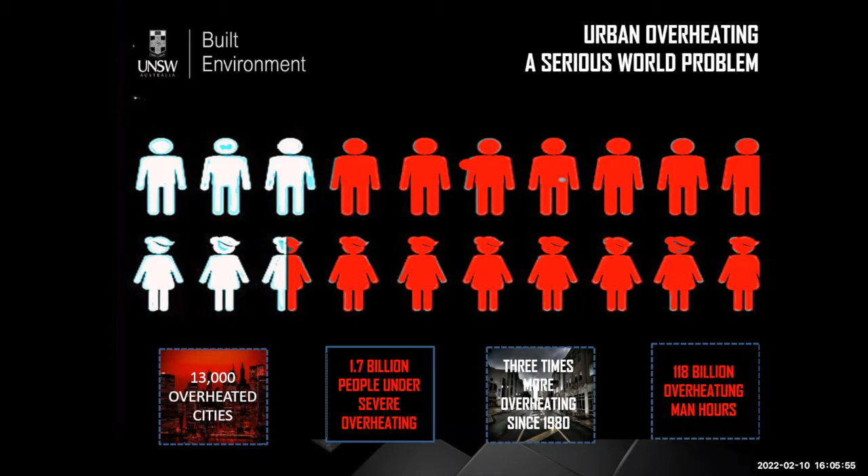Is urban overheating a serious problem? Yes, it is one of the most serious problems around the world. According to a recent publication, there are more than 13,000 overheated cities around the world. There are about 1.7 billion people under severe overheating. Since 1980, the number of overheating hours has almost increased by 300%. In total, there are 118 billion overheating man-hours around the world. It seems to be one of the major climatic problems around the world.

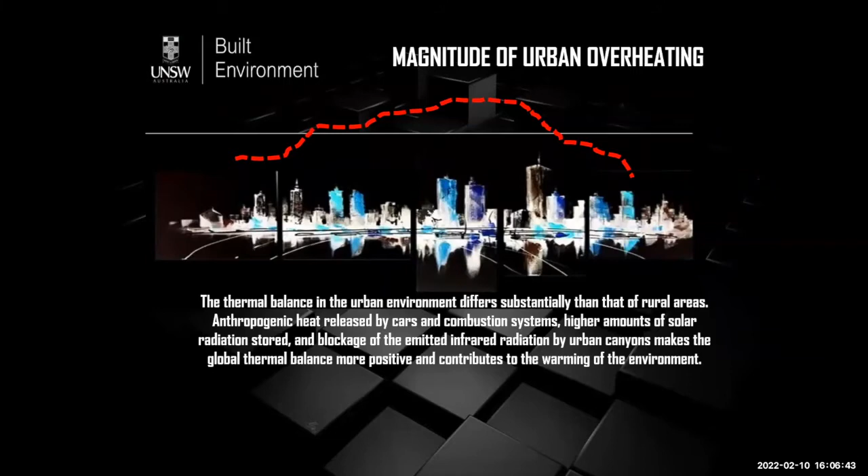Urban overheating has to do with the increase of temperature in our cities, in the denser parts of the cities, or in the center of the cities, because of the positive thermal balance in the urban environment, and the big difference between urban and rural areas. This is because of the anthropogenic heat released by cars, combustion systems, etc., the high absorption of solar radiation, the advected heat, the emission of infrared radiation by urban canyons, and many other issues.

But the problem of urban overheating is not just the increase of temperature in our cities - it also has to do with the increase in the duration of hot spells. If we plot the number of days during summer with the duration of hot spells from 1890 to 2020, you will see that the number of hours above 37 degrees, the red bars, has increased tremendously during the very last years. The same also happened regarding the number of hours above 40 degrees.

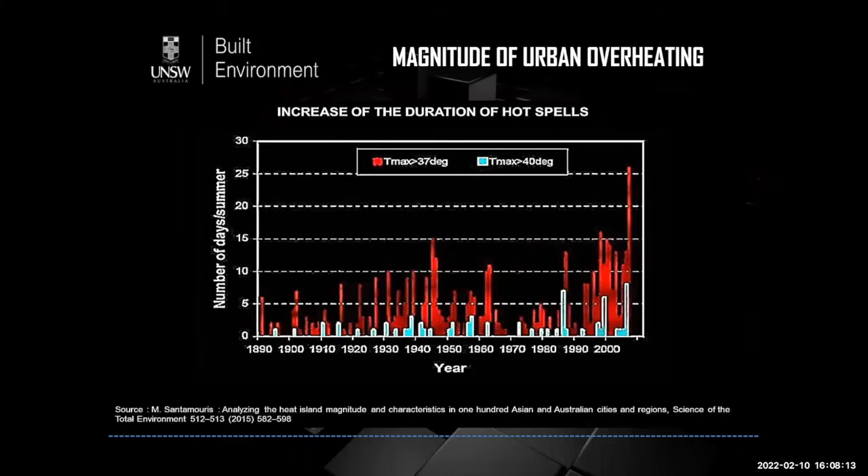Once we check the magnitude of urban overheating, and especially the number of heat wave episodes above 37 degrees, from the beginning of the past century up to our days, we see a tremendous increase of the magnitude, but also a very important increase of the frequency of extreme events. So urban overheating is the increase of the temperature of our cities, together with the increase of the duration of the hot spells, and the increase of the magnitude and frequency of extreme climatic events, heat waves.

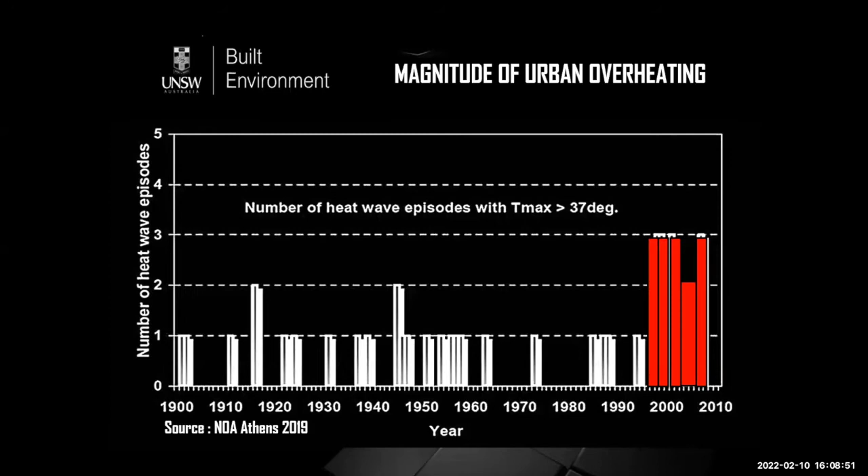Do we have a good knowledge of the characteristics of the phenomena? Yes, because either we monitor urban heat island using space technologies and understand the magnitude of the so-called surface heat island, or with ground stations we can have a lot of information about the distribution of the temperature. We also have very powerful monitoring and simulation tools like mesoscale modeling that allow us to understand in good detail the characteristics of urban heat island.

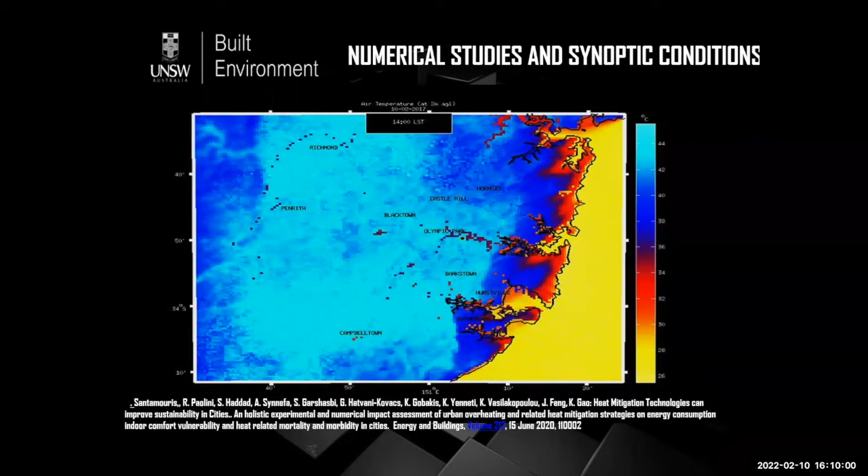You see, for example, here in Sydney, the results of mesoscale modeling that show the difference in temperature between the eastern part of the city, which is the coastal part, and the western part of the city, which is close to the desert, is about 10 degrees. So in a distance of about 40 kilometers, there is a 10 degree temperature difference.

But it's not just that. During the very last years, we have understood that there is a very special link and synergy between global climatic change, extreme heat events, and the magnitude of the urban heat island. We now know that during extreme climatic events, the magnitude of the urban heat island increases considerably. For example, in Sydney during heat waves, the magnitude of the urban heat island increases by about 5 degrees.

This is because of the higher height of the planetary boundary layer that increases the advected heat to the city from the desert.

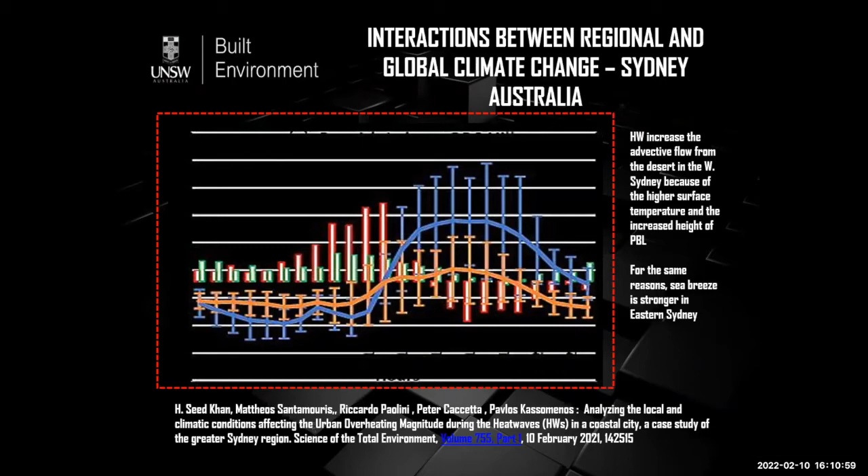So climatic change, and urban climatic change or urban overheating, has to do with higher temperatures, longer hot spells, higher frequency of heat waves, higher magnitude of heat waves, and there is a very strong interaction and synergy between global and local climatic change.

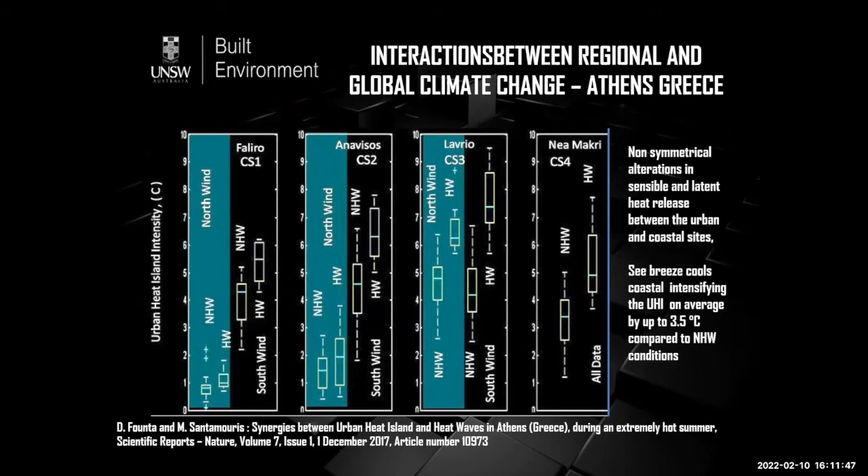It is evident that the increase of temperature in our cities may have a tremendous impact on energy, health, pollution, vulnerability, economy, comfort, and everything. During the very last years, we have performed a lot of studies trying to understand the impact of urban overheating on the different aspects of our life, and especially on energy.

Urban overheating affects very much the supply of energy and also the use of energy. It is evident that because of the higher temperature, the energy consumption of buildings, especially for cooling purposes, is increasing tremendously. On the other hand, it increases very much the peak electricity demand, obliging utilities to build additional power plants, increases the frequency of blackouts, and has a tremendous impact on the production and supply of electricity.

We need additional power plants. We have power disruptions. We have decreased efficiency because of the higher temperature. We have much higher increased electricity losses.

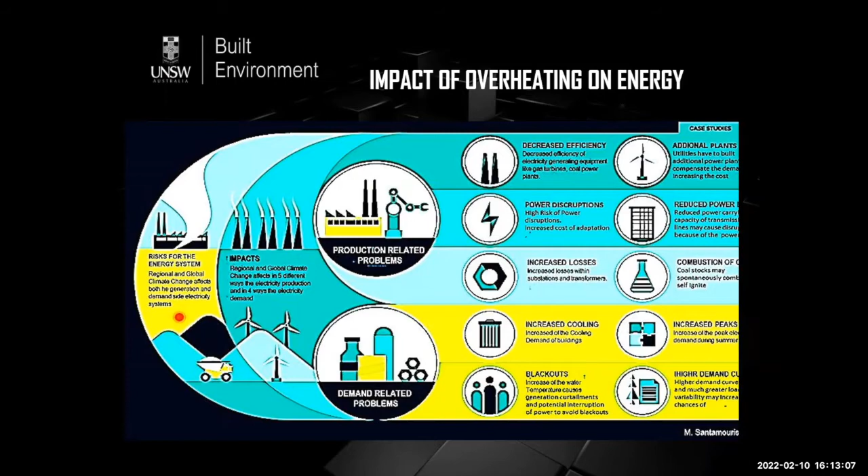Can we quantify all these impacts? Do we know exactly what is the real impact of urban overheating on energy? Yes. During the last years, data from several cities has allowed us to understand that the global energy penalty per square meter of city is close to 2.3 kilowatt hours per square meter on average, while the global energy penalty per square meter of city per degree of temperature increase is close to 0.7 kilowatt hours per degree and square meter. Or, the global energy penalty per person is close to 230 kilowatt hours per person, or per degree of temperature increase is 78 kilowatt hours per temperature increase per person.

So it is very important, and it is a very significant impact, the 230 kilowatt hours per person that we have to consume in order really to compensate the impact of urban heat island and urban overheating. This is really a very important problem.

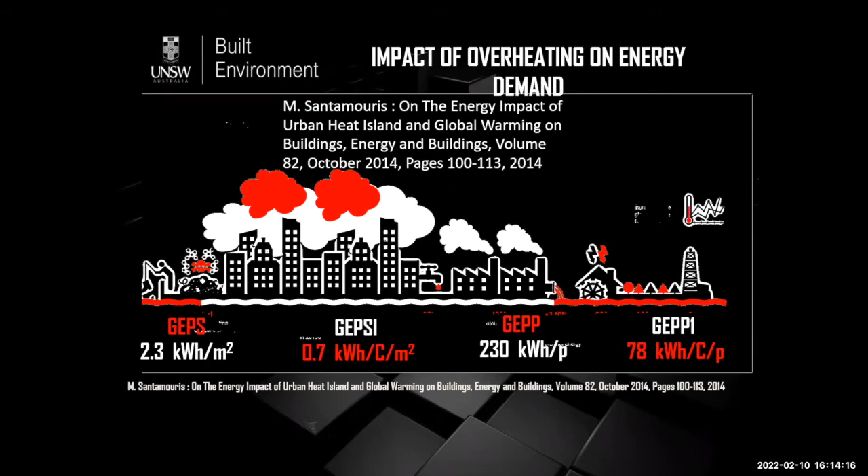This is very well verified and validated through real measurements of energy consumption in several cities. I'd like to show you the results from Seoul city in Korea, where we monitored the cooling energy consumption of thousands of buildings located at the center of the city under urban heat island, or out of the city. We found that the average monthly cooling energy consumption increases between 0.2 kilowatt hours per square meter up to 2 kilowatt hours per square meter, which is a very important energy increase. So the energy impact of urban overheating is very well determined, very well known, very well documented.

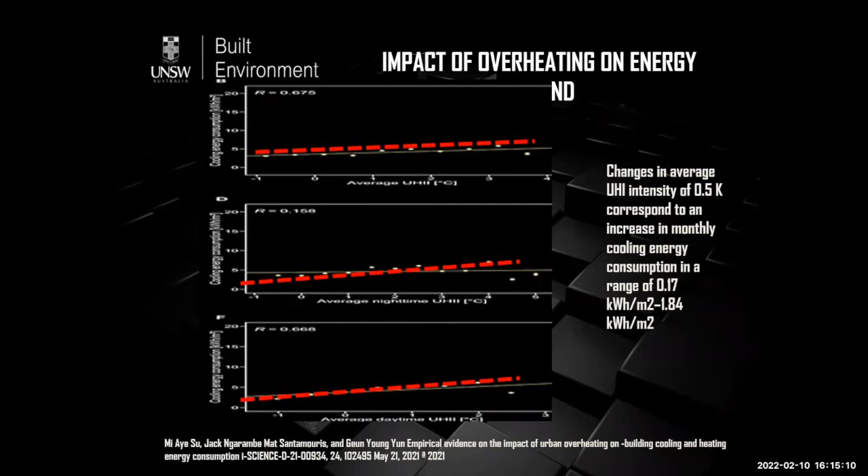This brings us to the very important problem we may face in future energy consumption for cooling. If we plot the actual energy consumption for cooling all around the world, it is quite low—it represents about 10 to 12% of total energy consumption in the residential sector. But given the tremendous increase of temperature in our cities, global climatic change, increase of population, increase of floor area per building, increased consumption, and increased availability of air conditioning, we expect that energy consumption for cooling will increase tremendously by 2050.

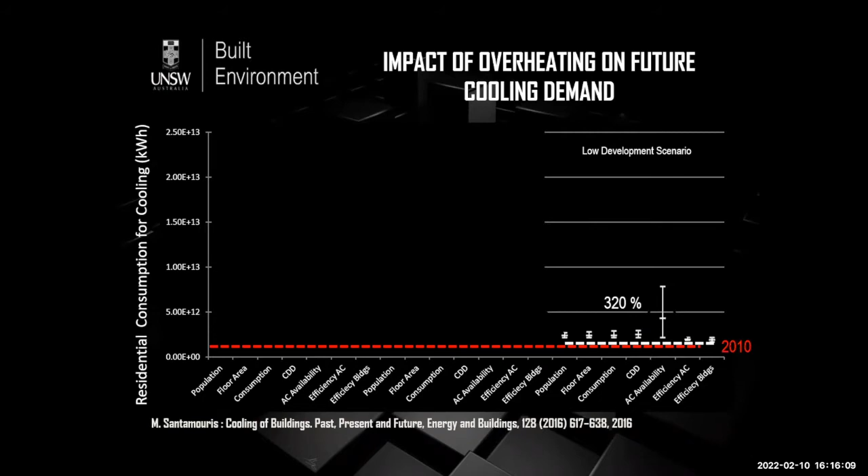There are three scenarios. The low development scenario predicts that by 2050, the total energy consumption for cooling may increase up to 320%. Under an average development scenario, the increase may be of the order of magnitude of 750%, while under a high development scenario, the increase of cooling demand may be of the order of magnitude of 2,270%. Of course, when uncertainties are taken into account, this increase may be much, much higher.

This brings us to the major question: how to face the problem of urban overheating, and how to find the proper resources to satisfy such a demand. Such an increase of energy consumption for cooling will be a tremendous problem for developing cities. There are studies showing, for example, that just one Indian city, Mumbai, may present by 2050 higher energy consumption for cooling than the whole United States.

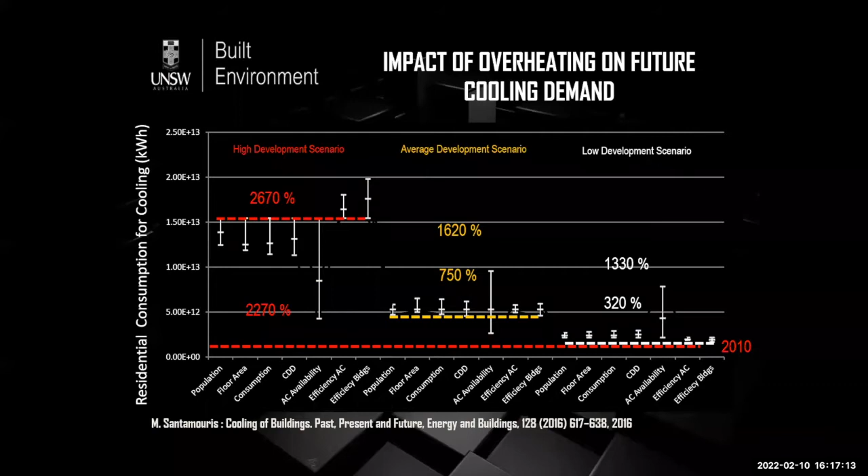But it's not just the increase of energy consumption for cooling. Urban overheating is increasing the concentration of harmful pollutants, especially ozone. 87% of the increase in cases of ozone increase is because of overheating. And the increase of ozone concentration because of urban overheating is quite high.

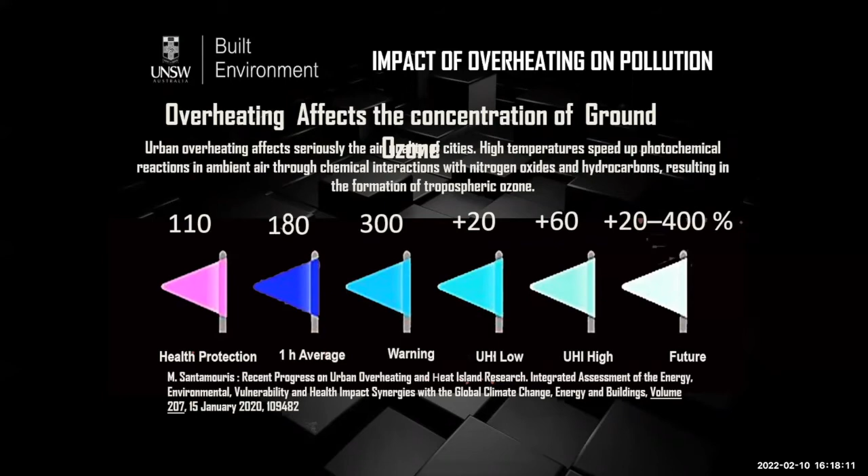For example, the limits or thresholds for health protection around the world average around 110 units. But on average, the 1-hour average is 180. The warning level that happens many times around the world is 300. But in the future, many studies predict that the concentration of ozone may increase up to 400%. And ozone is a killer.

On the other hand, we know very well that because of urban overheating, pollution is increasing. For each degree of temperature increase, the pollutants emitted by the power plants increase by almost 3%.

Apart from the impact of urban overheating on energy and pollution and environmental quality, one of the major impacts has to do with the vulnerable population. We know that vulnerable population lives in low quality buildings in deprived areas of cities, and this has a tremendous impact on their quality of life. Urban overheating increases the vulnerability of low-income population, increasing the use of air conditioning by almost 100%. Studies show that vulnerable population living in low-quality buildings need almost 100% more cooling to compensate for urban overheating than the average.

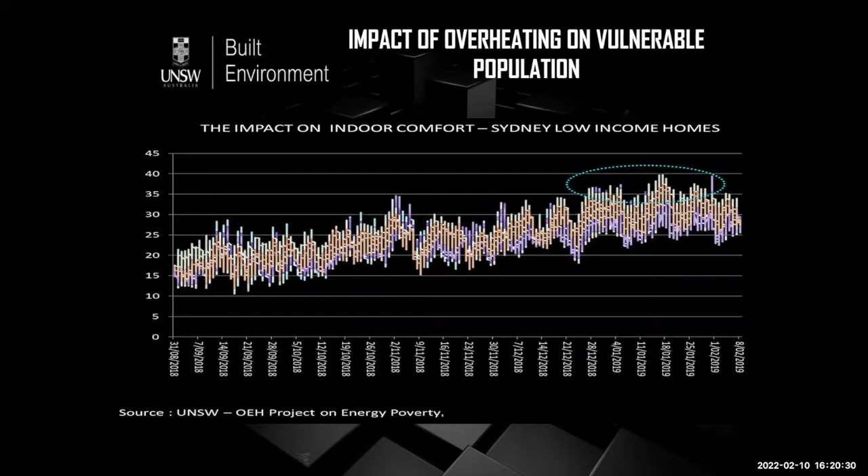The same happens, for example, in Western Sydney—not during a heat wave, indoor temperatures in low-income houses may be as high as 40 degrees. This brings us to the major problem and major impact of urban overheating, which has to do with health.

The impact of urban overheating on health is not something which is really simple. It is very much related to several parameters, mainly demographic factors which really affect the health of the population, socioeconomic factors, and also the quality of the health infrastructure in different cities.

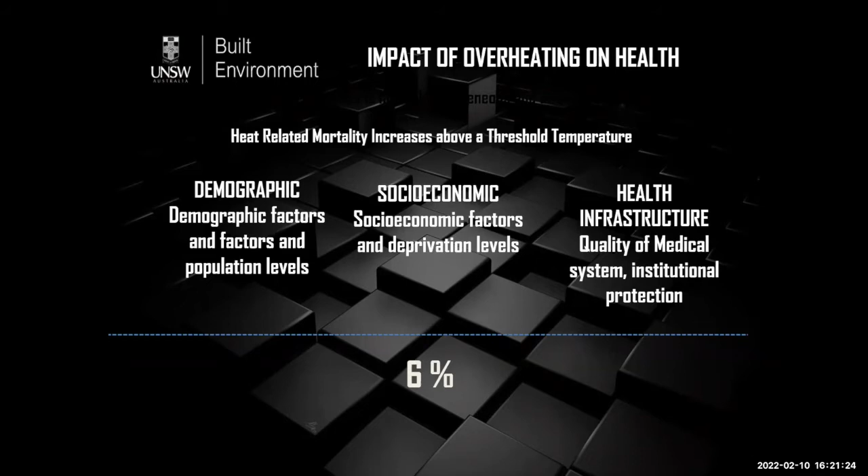On average, a recent study has shown that people living in overheated parts of cities present 6% higher heat-related mortality than the rest of the population in our cities. So there's a tremendous penalty that is paid because of urban overheating in our cities, and this is very well known through different studies all around the world.

So we don't behave the same way against urban overheating. In heating-dominated climates, the threshold temperature above which heat-related mortality is increasing is much lower than in cooling-dominated climates. This is very important once we plan for the future and try to assess the future of health in our cities.

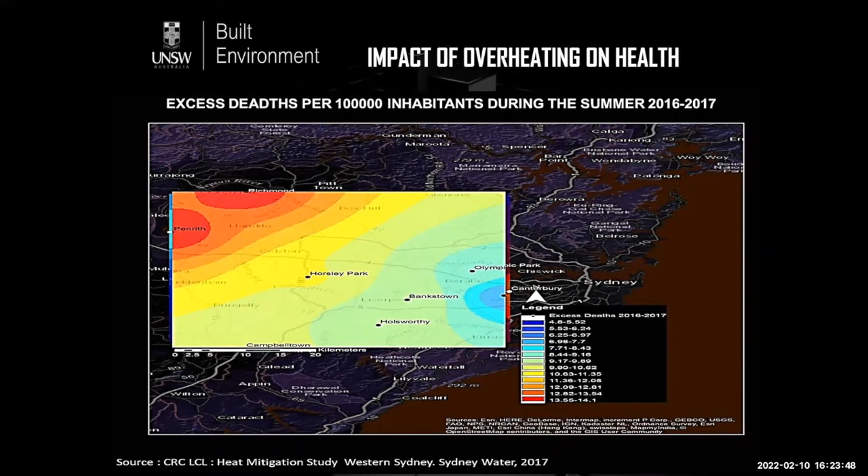So this is an extremely well-documented phenomenon that really needs our attention. As I mentioned before, this is not a simple phenomenon, and many parameters have to be taken into account. Mainly, it is very important to understand the role of the quality of our outdoor environment, but also of the indoor environment and the quality of our houses.

A recent study has shown that urban heat island and overheating outdoors may increase heat-related mortality by 6.1 deaths per 100,000. But once this is combined with low quality indoor environment, this increases by a factor of 3 or 4, going up to 23.5 deaths per 100,000.

So heat-related mortality is really a complex phenomenon that very much relates to outdoor environment and urban overheating, but also the quality of our housing.

I tried to present the main impact of urban overheating on energy, on environmental quality, on survivability, and also on health. But really, these are the bad news - this is what we know about the actual problem. Do we have good news?

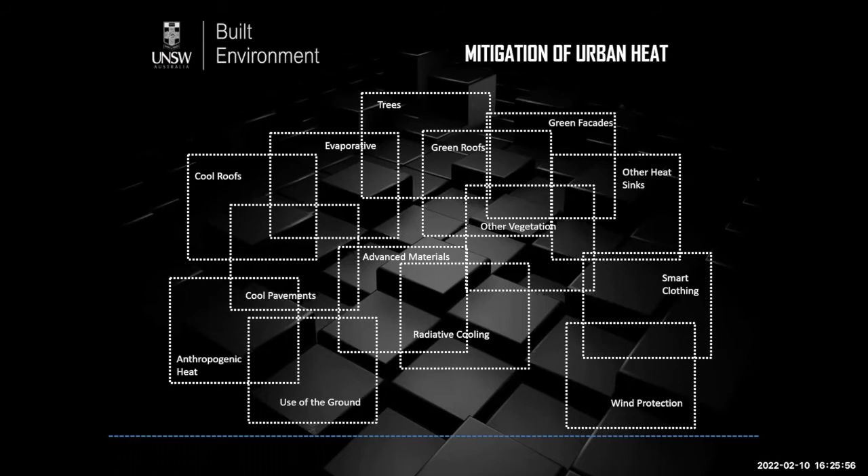Yes. During the last 15, 20 years, there has been very important research carried out, trying to develop mitigation technologies in order to decrease the temperature of our cities. These mitigation technologies have to do with the development of several technologies like evaporative technologies, cool roofs, increased vegetation in our cities, cool pavements, and many other technologies that have been developed, tested and implemented in order to decrease the temperature of our cities.

I will try to go through the main developments of overheating mitigation, and concentrate on the development of the more promising mitigation technologies - the use of so-called cool materials, or intelligent materials, in order to decrease the temperature of our cities.

We started almost 20 years ago, 15-20 years ago, with the development of high reflective white coatings. Then we developed the so-called color infrared reflective coatings, and gradually we developed several materials. Today we have very powerful super cool materials that may decrease the temperature of our cities by up to several degrees.

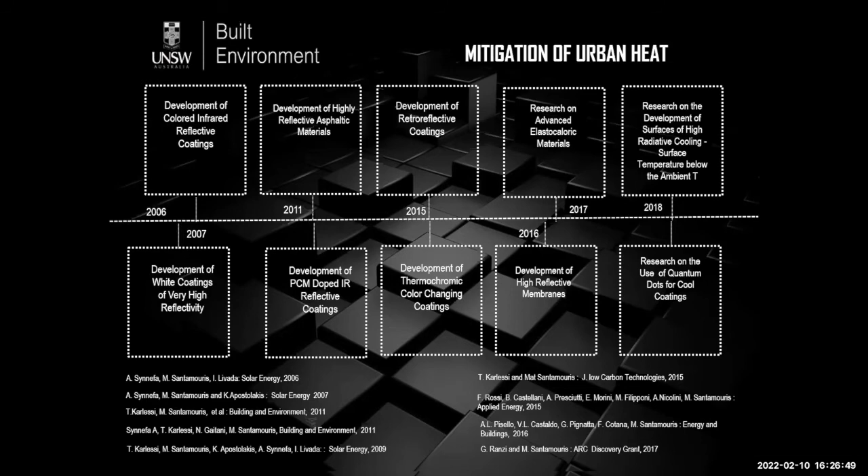I will try to go through the recent developments and present you some of the most important developments on mitigation technologies, especially on cool materials for mitigation technologies. I will try to concentrate on three main technologies: thermochromic technologies, photonic technologies, and fluorescent technologies.

Thermochromic technologies have to do with the development of materials which can change color as a function of the outdoor temperature.

So we may have a material that during the winter may be dark, absorbing solar radiation, and during the summer may be white, reflecting solar radiation.

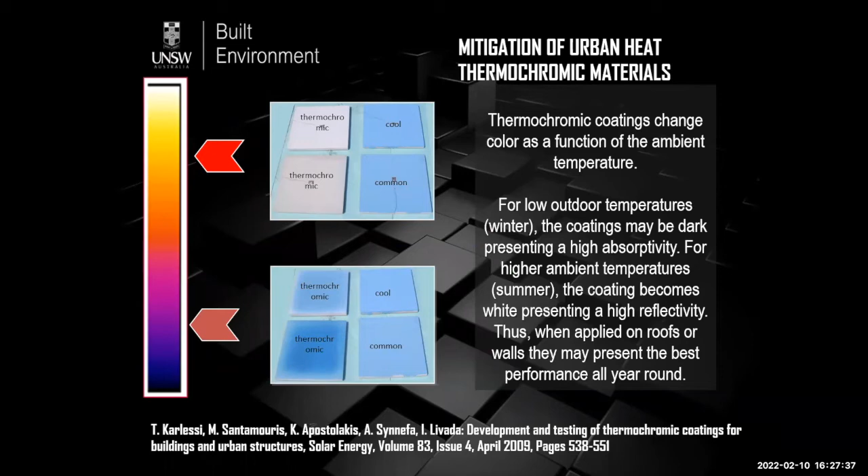You see in this graph the development and the image of some thermochromic materials. These thermochromic materials have been developed and are tested, and we have succeeded to decrease the surface temperature of these materials up to 21 degrees. You see in the right part of this slide the difference between the thermochromic materials and the infrared reflective cool materials, or the common materials.

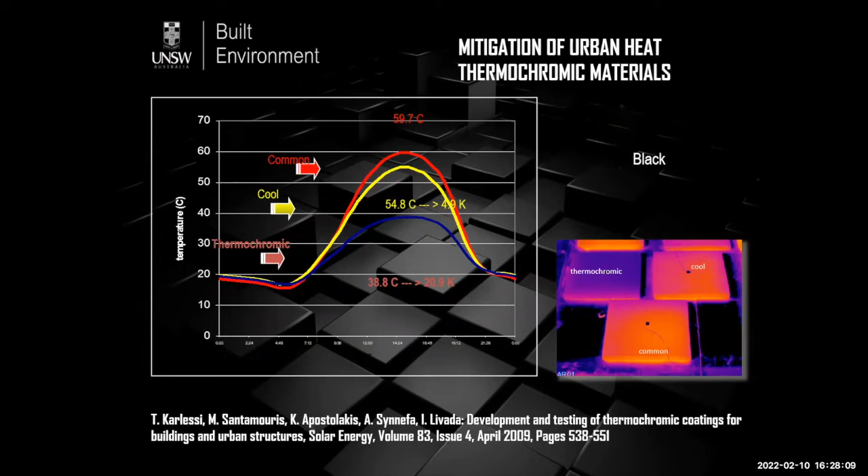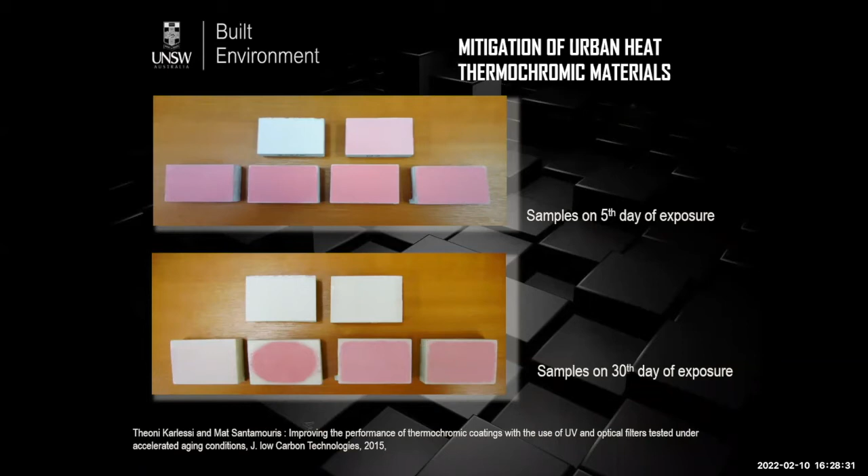These thermochromic materials, at the initial phase, presented important aging problems. Now we have developed some optical filters which are applied on the thermochromic materials, and we have tremendously increased the lifespan of the thermochromic materials. Thermochromic materials are now commercialized, and they may be used in the next few years in order to decrease the temperature of our cities.

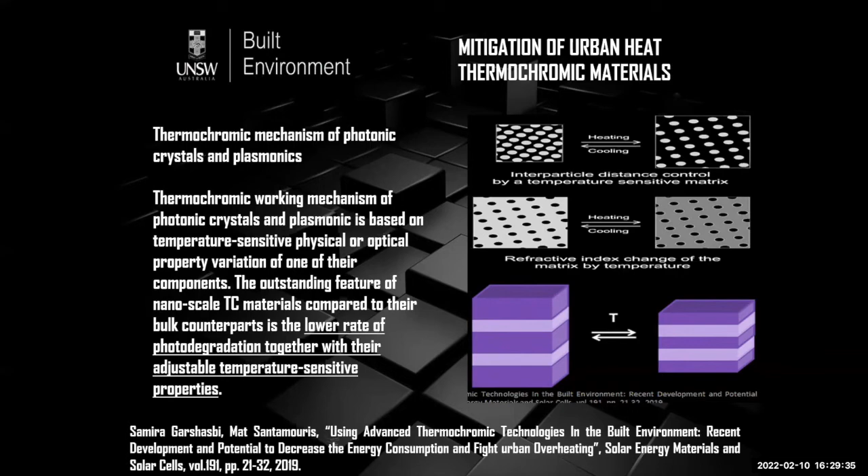But there are many promising new developments regarding thermochromic technologies, especially the use of photonic crystals and plasmonic crystals for thermochromic materials. These new materials, which are under development, present outstanding features of nanoscale thermochromic materials compared to the bulk counterparts, in the low rate of photodegradation. The major benefit and advantage of this material is that they do not represent any problem of aging, while the potential for temperature depression is very, very high. These materials are not yet in the market, but we expect that in the next 2 or 3 years, photonic thermochromic materials will be available.

The major developments regarding mitigation materials have to do with the development of radiative cooling materials. Radiative cooling materials, or photonic materials, are materials that present a very high reflectivity in the solar radiation, but also a very high emissivity in the so-called atmospheric window between 8 to 13 micrometers.

So we may have a very high reflection of the incident solar radiation, but also a very high emission of heat by the materials, which is emitted in the atmospheric window, meaning it can escape to space. So in this case, we may have very low surface temperatures.

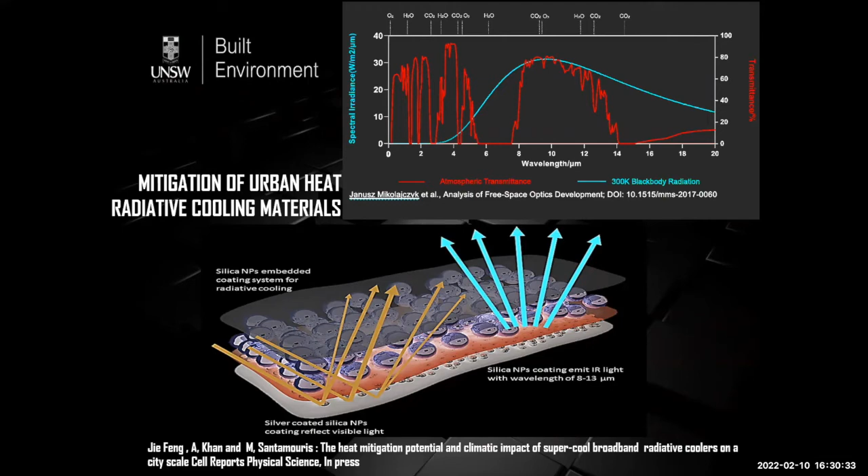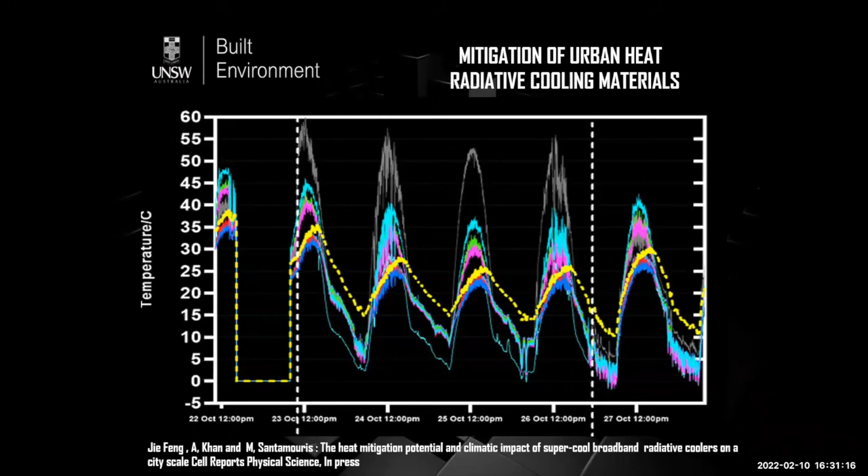While the ambient temperature was close to 40, 45 degrees, the surface temperature of these materials was close to 25, 26 degrees. These materials are developed and tested now in real applications, especially in a big mitigation project we have in Riyadh, Saudi Arabia. And I can show you the distribution of the temperature and the decrease of the temperature across the city during a typical day.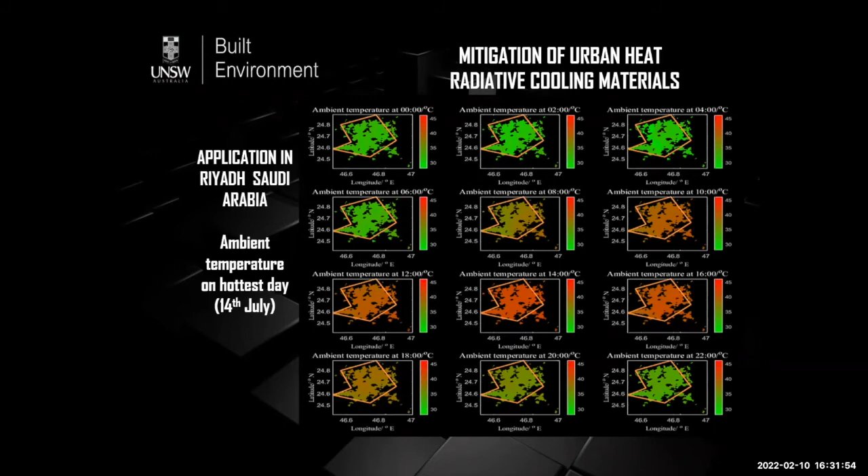By using, in a very hot or warm environment in Riyadh, the supercool materials, we can really decrease the temperature up to 4 or 5 degrees. And this is really a major achievement.

At the same time, we may have important changes in the airflow because of the decrease of the planetary boundary layer. And you see here the results of the use of supercool materials in Kolkata, India.

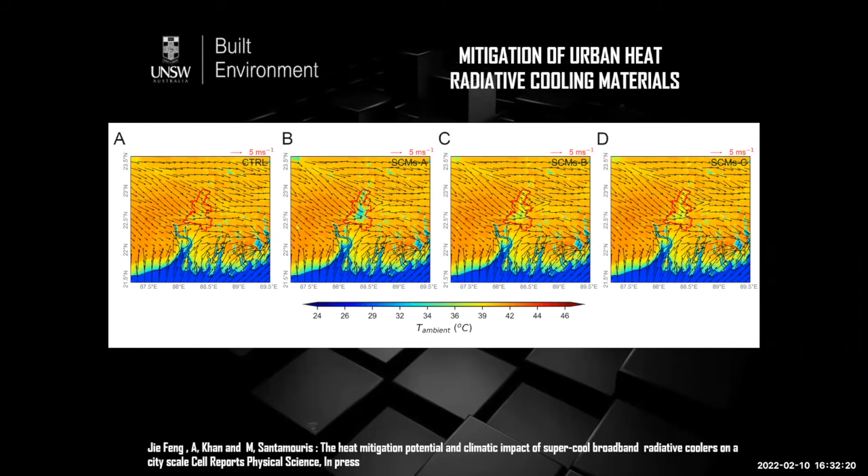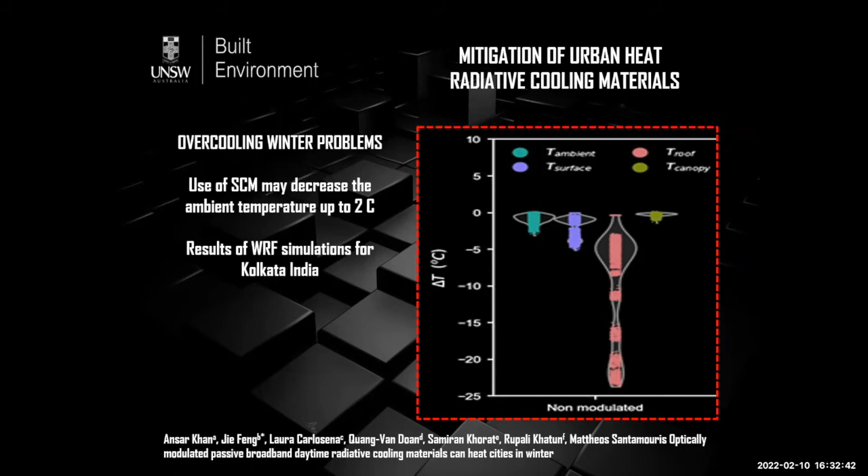However, the use of supercool materials has a serious problem. During the winter period, it may create some problems of overcooling, increasing the heating energy demand of buildings. Our testing has shown that the use of supercool materials may decrease the ambient temperature during the winter up to 2 degrees. So this is a major drawback.

The recent scientific developments and research we have carried out have allowed us to create a new generation of supercool materials where the emissivity and reflectivity of the materials is modulated. So we may have very high reflectivity and very high emissivity during the summer period, and very low emissivity and very low reflectivity during the winter period.

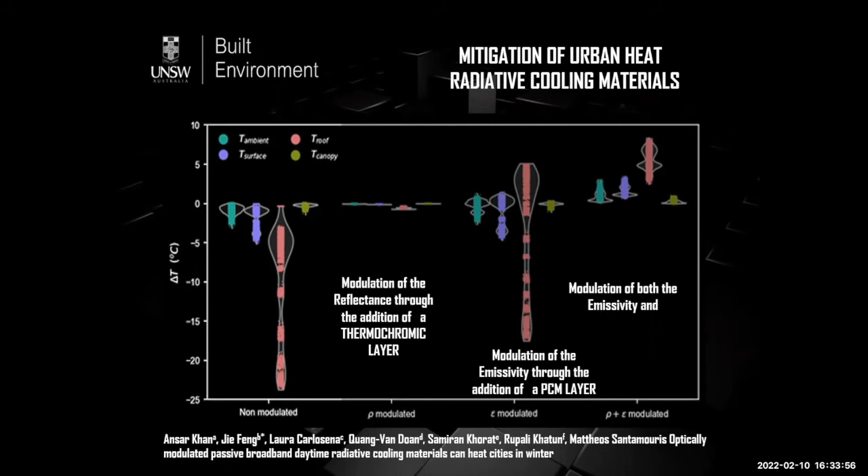When this happens, we may have a decrease of the peak temperature of the cities up to 4 or 5 degrees during summer, but also during the winter period the temperature of the city may increase up to 2 degrees. So this kind of material is a win-win technology that may decrease considerably the peak temperature of our cities, but at the same time may increase the temperature of our cities if we wish to have an increase during the winter period.

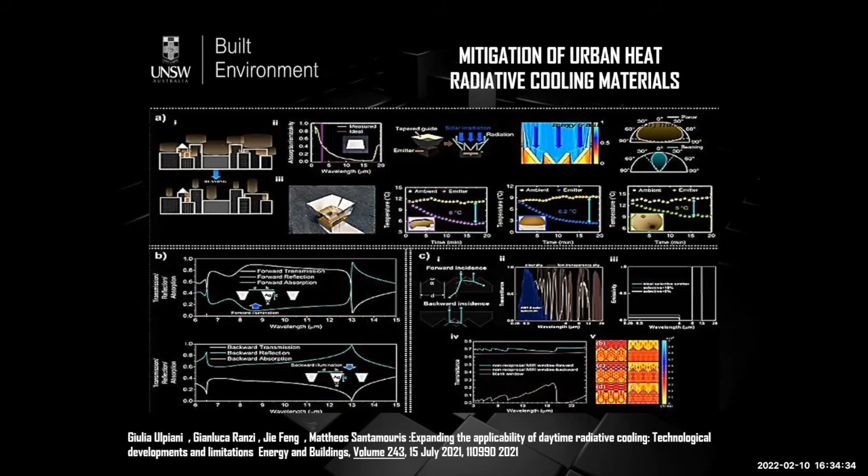We try to further improve the performance of these supercool photonic materials by using technologies that allow emission of radiation through the materials, but not absorption of atmospheric radiation. This is a bit difficult. There are different technologies that have been tested, not yet achieved, but once this new technology is developed, we expect we may decrease the surface temperature of the materials by up to 30 or 35 degrees.

The third technology of mitigation materials I'd like to propose and present has to do with the development of fluorescent cooling materials.

Fluorescent cooling materials, and especially quantum dots, are very small semiconductor particles with a specific characteristic: they do not absorb heat. Once heat or solar radiation is absorbed by the material, it is immediately re-emitted in the form of fluorescence. So the temperature really remains the same, or even decreases.

The use of new generation fluorescent materials allows emission of higher energy than the absorbed energy. So this kind of material can act as a natural air conditioning, decreasing the temperature.

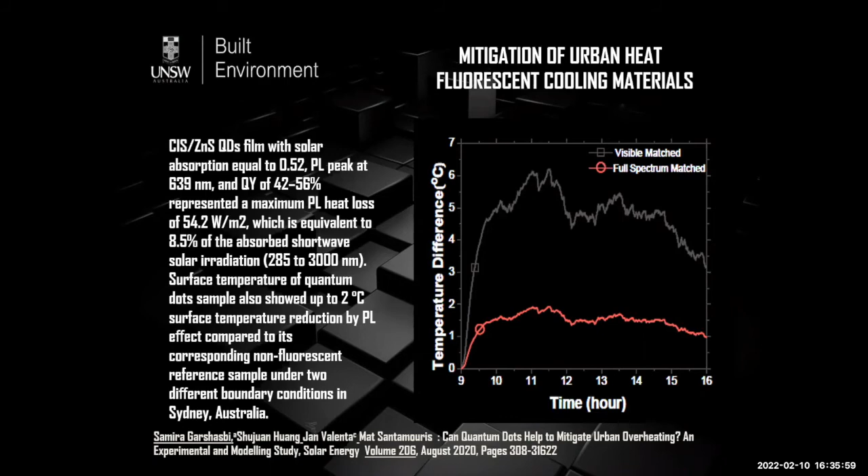We have developed this kind of fluorescent cooling material, and the first generation, with low fluorescent efficiency, has allowed us to decrease the surface temperature of these materials by about 2 degrees. This is not very important compared to the developments of thermochromic or photonic materials.

But the second generation of these materials, which uses a combination of reflective materials and fluorescent materials, has allowed us to decrease the surface temperature by up to 11 or 12 degrees. This has already been achieved and may be commercialized in the next period.

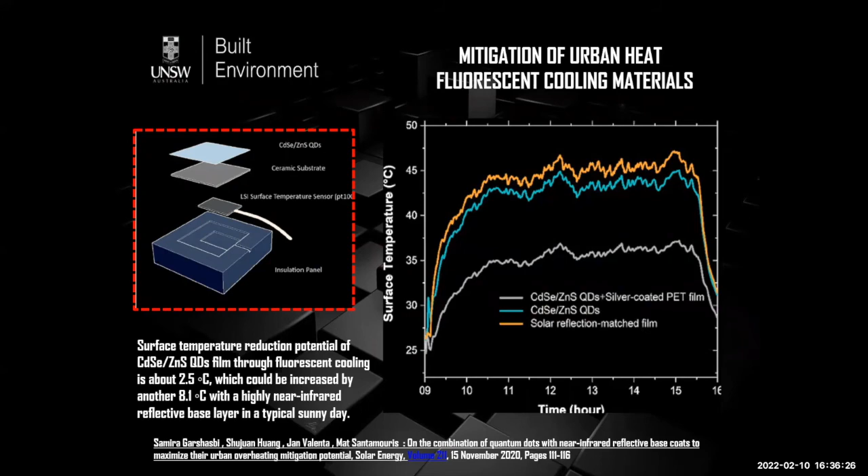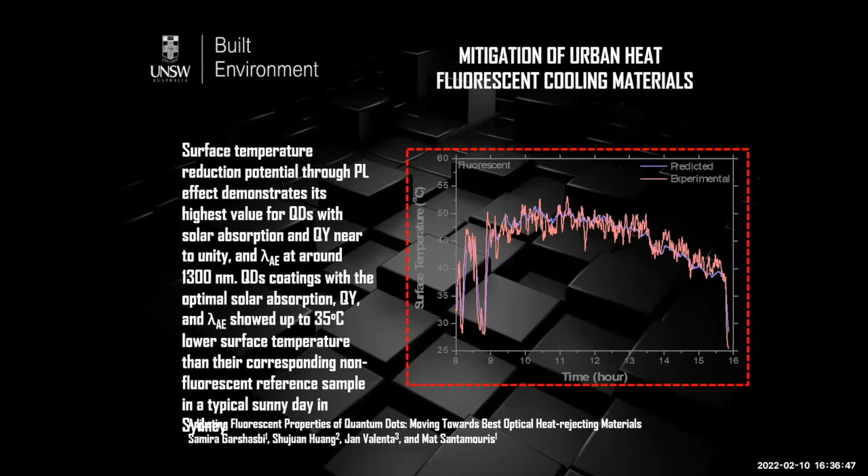We are working on the development of a new technology of fluorescent materials, especially materials that present anti-Stokes properties, which means they emit more than what they absorb. In this case, we expect to achieve a temperature decrease of up to 35 degrees.

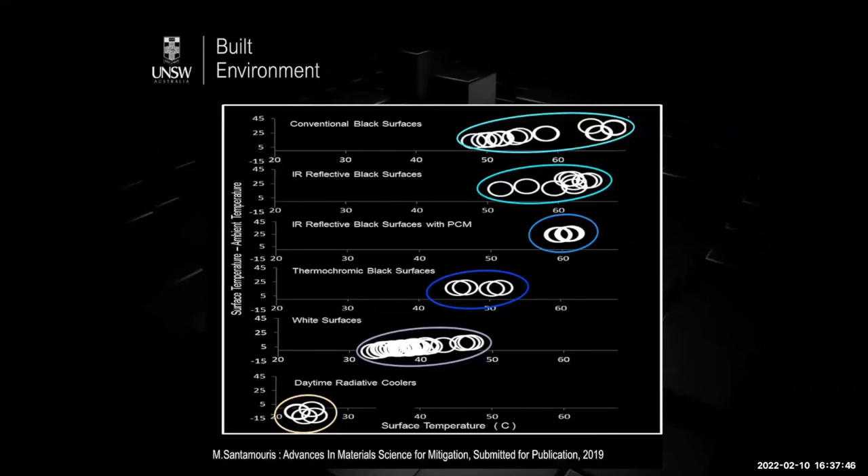So in our days, during the last 20 years, we have succeeded in developing materials, most of which are now commercialized, which may decrease the surface temperature of cities by up to 15 degrees, and the ambient temperature of cities by up to 4 or 5 degrees.

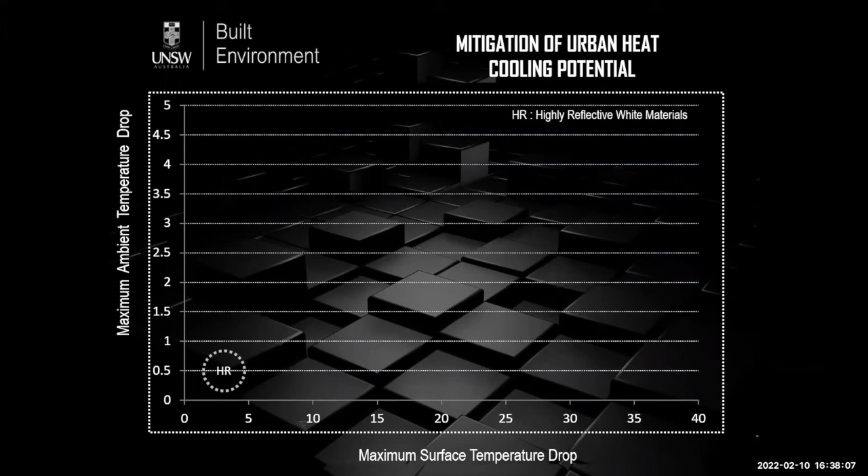If we follow the developments of mitigation technologies, we started with white reflective materials, which achieved a decrease of temperature up to 0.5 degrees. Then we moved to infrared reflective materials, which achieved a decrease of 0.6 to 0.7 degrees. We continued with new materials for pavements and thermochromic materials, which extended the capacity of mitigation materials up to 1.5 degrees.

Then quantum dot fluorescent materials, which may decrease the temperature up to 2.5 degrees, and then daytime radiative cooling or photonic materials, which may decrease the temperature up to 2.5, 3 degrees.

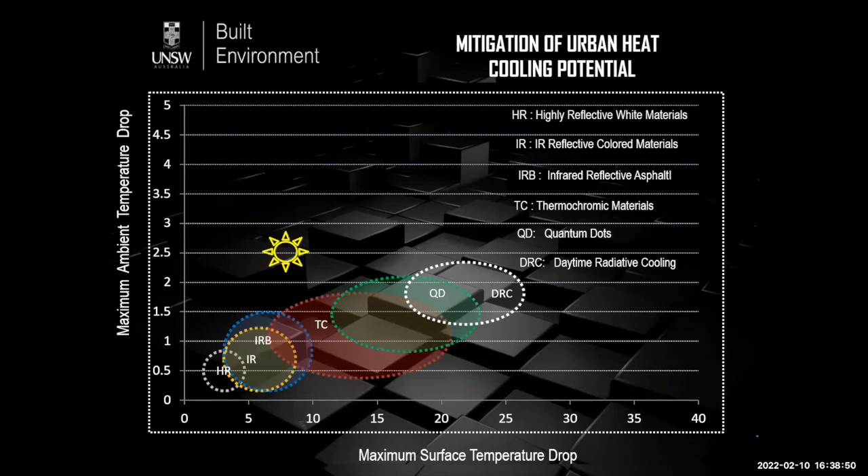Actually, I'm sorry - we have more than 450 large-scale mitigation projects all around the world, where the peak temperature has decreased by 2.5 degrees.

We expect that in the near future, through the use of high efficiency fluorescent and photonic materials, we may decrease the temperature of cities by up to 4 or 5 degrees.

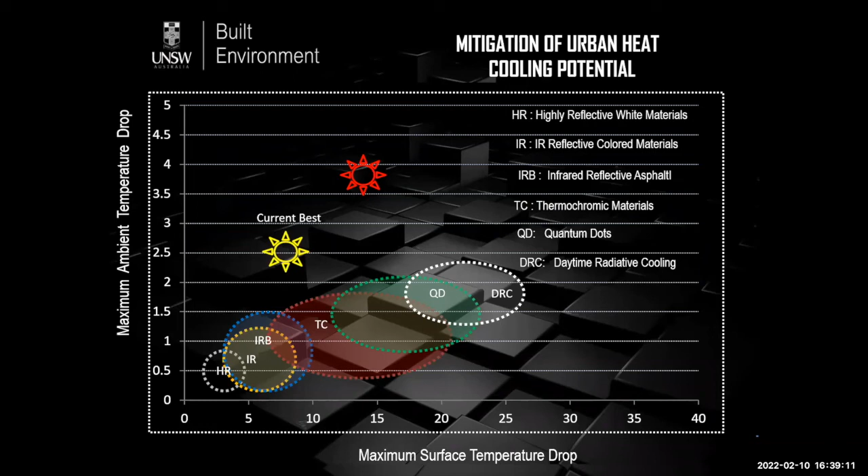This important decrease of the temperature of our cities has a tremendous impact on energy consumption of our buildings. Our studies for Riyadh in Saudi Arabia have shown that the use of supercool materials may tremendously decrease the peak electricity demand and the energy consumption for buildings.

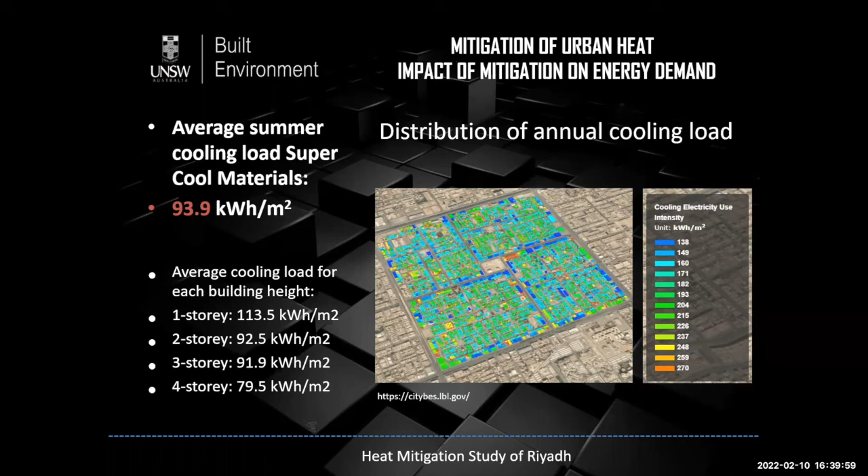We may have a decrease of energy consumption, especially in areas like Riyadh, of up to 10 kilowatt hours per square meter per year, just by using supercool materials at the building surface and also at the urban scale.

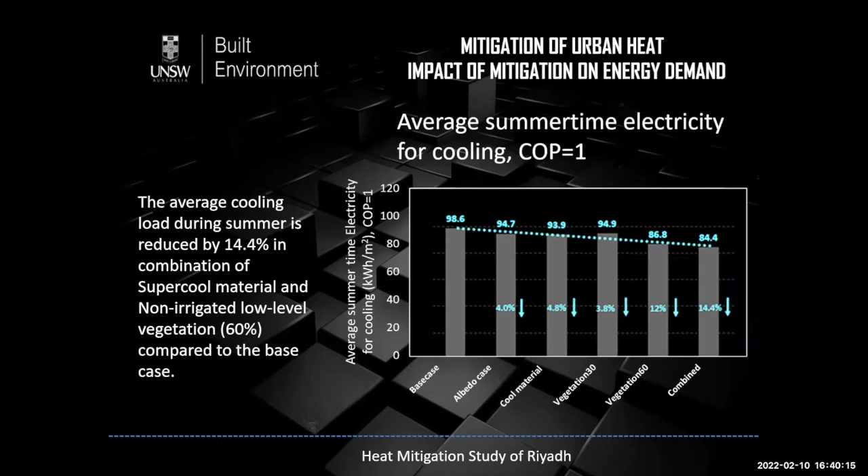It's very clear that we can really have a decrease of the energy consumption of our buildings or cities of up to 15 degrees, or 15%, once these materials are used. This has a tremendous impact on our cities.

Studies for Sydney, trying to elaborate future scenarios, show that - in the upper right part - the red part shows the actual cooling demand of buildings.

The yellow part shows the heating demand. By 2050, because of urban overheating, we expect an increase of the cooling demand by let's say 300% without a substantial decrease of the heating demand. However, once we are using mitigation and adaptation technologies by 2050, we may decrease the cooling demand up to 80-90% and the heating demand up to 50 or 60%.

So there is hope. And the development of these materials, and of future materials, may decrease the temperature of our cities and decrease at the same time the energy consumption of our buildings.

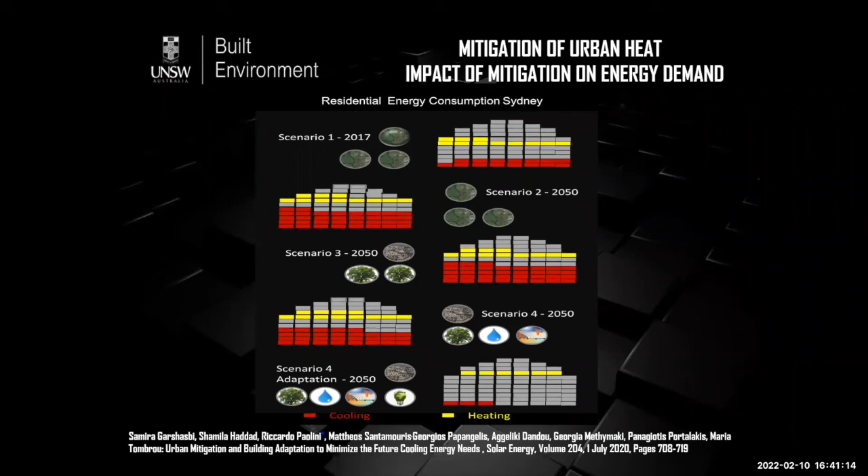So once we really decrease the temperature of our cities by 1 degree, on average we may decrease heat-related mortality by 20%. And these are results from more than 60 cities all around the world.

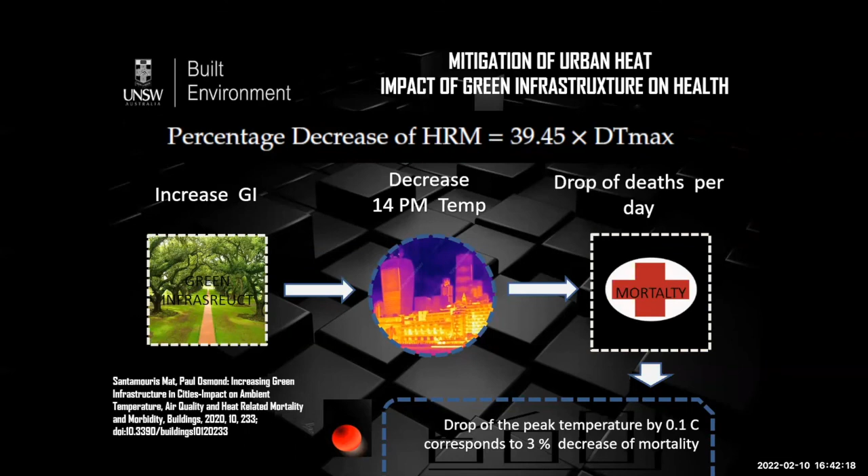Similar results are obtained also once we use green infrastructure, or we increase the green infrastructure in our cities. We may decrease heat-related mortality considerably once we really decrease the temperature of our cities.

So trying to conclude this short presentation, I'd like to stress that we actually have a serious problem of urban overheating. Cities present almost 6 to 10 degrees higher temperature during the summer, and we have more than 450 cities all around the world which present such a problem of overheating.

On the other hand, urban overheating and the increase of the temperature of our cities has a tremendous impact on the energy consumption of our buildings. It may increase the energy consumption by up to 100%.

Also, there's a tremendous impact on heat-related mortality. There are cases that because of urban overheating, heat-related mortality may increase up to 300%.

Also, there is a tremendous impact on the peak electricity demand, which obliges utilities to build additional power plants. We have cases where the peak electricity demand is increasing by about 100% because of urban overheating.

Mitigation techniques have really contributed a lot to decrease the temperature of our cities. Actually, we are able to decrease the temperature of our cities by up to 2.5 degrees. We hope that in the near future we may decrease the temperature by up to 4 degrees.

On the other hand, we know that the use of advanced mitigation technologies may decrease, on average, the energy consumption of buildings by up to 40%, and perhaps more once supercool materials are used.